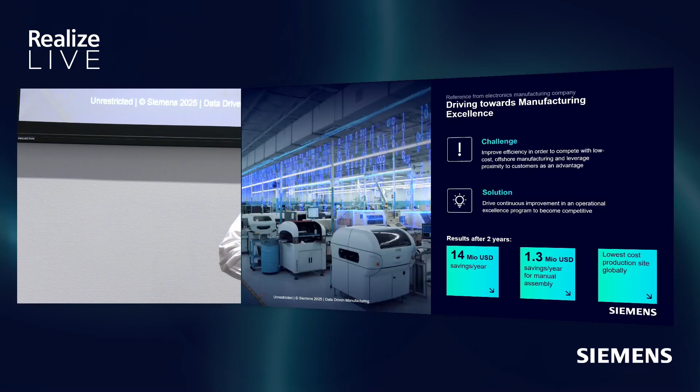So their solution was to drive a continuous improvement program as an operational excellence program. And after 2 years that they embarked on this journey, they achieved $14 million recurring savings per year on the SMT line, $1.3 million savings on a final assembly line, and overall became the lowest cost manufacturing site worldwide for this company.

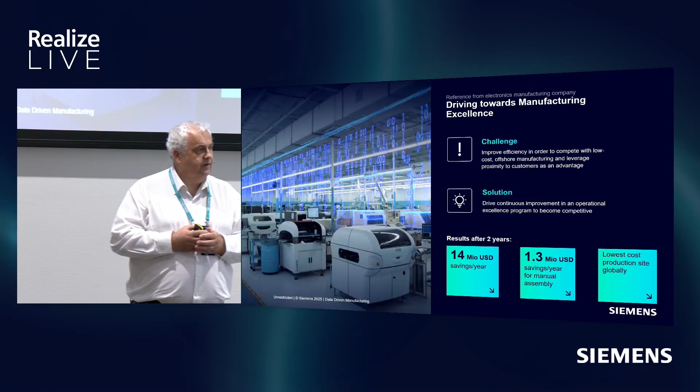Now, why do I start with this little story here? Because I've been in manufacturing for more than 30 years. I've lived in the US, I lived in Asia, I lived in Europe. I've seen many, many customers around the world. And one thing they always had in common, each year they had to achieve a new target. They had to improve something. Either it was productivity or quality or on-time delivery or incidents or inventory turns.

It just never stops. And you know what? When you set a target, I need to increase my productivity 7% for this year, and maybe after 11 months you even achieve it, what do you do? You lean back and say, that's it, finally done? Never. You say, okay, what shall we do next? Do we increase more? 7% was not enough, or shall we go after another KPI?

And once you optimized, all of a sudden a new technology comes in. Now in electronics, for instance, you have smaller components. And now the whole quality drops, the productivity may drop, and you have to start this process again. So how did this company do it?

They knew benchmark was about 5 minutes. And so they set a target of about 5 minutes, and they started to optimize. Initially, the thinking was quite simple. Oh, I know how they do it. They have changeover tables, they have extra feeders. Let's order these additional assets. They went through procurement, ordered it. A few months later, it came, and all of a sudden, they reduced the changeover time from 30 minutes to 15, but they were not down yet at 5.

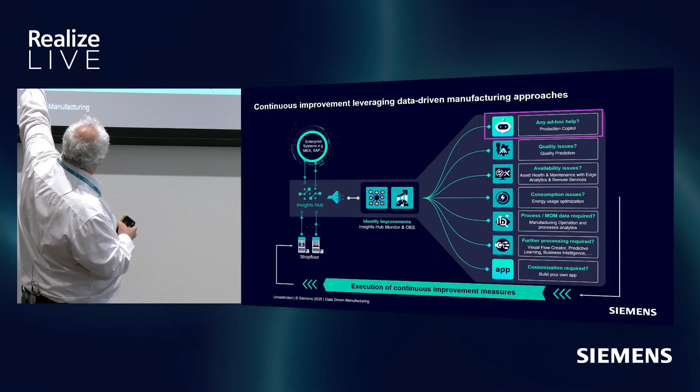We also created this framework, and just a few things to mention here is we collect direct data from the shop floor, but at the same time, we collect data from other systems like an MES, like a quality system, and so on. Because we bring those two data together to contextualize, and I will talk about how important contextualization is in a few slides as well. We created transparency, and we have several apps, and this is only a snapshot, there are more than this, to help you address certain problems a little bit more efficiently.

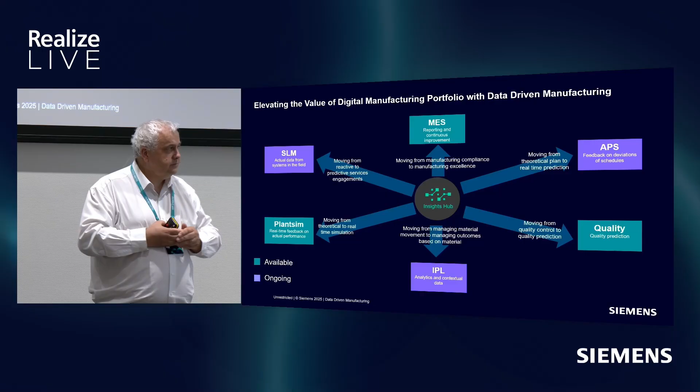The other piece that's always important for us is when we talk about data-driven manufacturing, you collect data and you create value. So we always look into how we integrate our data. Insights Hub is our analytics platform. When you integrate it with an MES system, where the main functionality is about process compliance, you turn it all of a sudden into a solution to help you achieve manufacturing excellence.

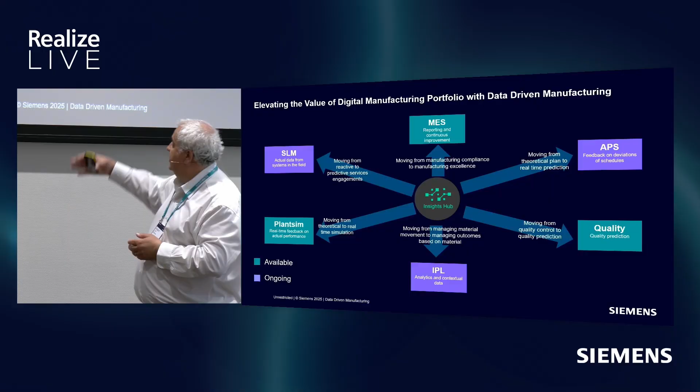Similarly, when you embed it with a quality system, it changes the quality system from quality control to quality prediction that allows you to improve quality ahead of time. Similarly, when we do it, let's say, with a plant simulation, where we have created all these virtual simulation models, all of a sudden we are updating it with real-time data and it becomes a real-time simulation model. So important for us is that we always enrich our applications that we also sell in our solution.

Now, what we see very often is when I talk to customers on how they do this process, the continuous improvement process. Today, most of the customers do it with pen and paper or Excel and so on. They don't really have a system here, and they struggle. Often I see them hiring consultants, and you know what the consultants do?

They're highly paid. They take stopwatches, they take time, they take files, they compile them, they try to create transparency for this improvement process, and they improve. But what we also very often see is once these consultants leave because the job is done, nobody takes the effort anymore to collect all this data, and the performance usually goes down.

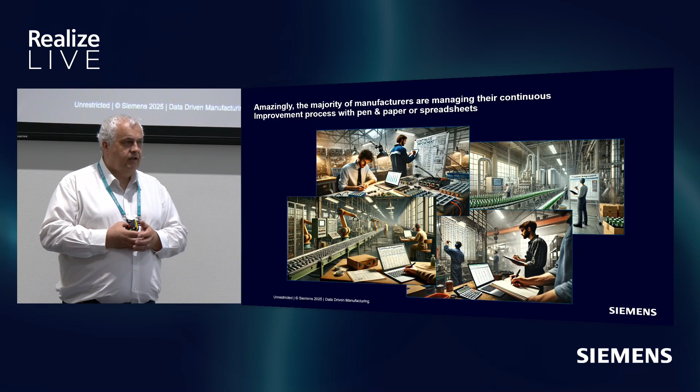What we also hear, some customers say, no, we are a little bit ahead. We believe that we are now in a digitalization age. But when we ask them, so what do you do with the data? Many of them say, well, we just started to collect data, or we haven't started to analyze it yet. We don't even know where to start.

Reality is, as long as you only collect data, you're only creating a jungle of data that's only cost. There is no value. And it's quite expensive. Right? You have to use the data. And one of the takeaways that I would like you to take away today is the statement that I make right here now: data without context is not knowledge, and knowledge without comprehension is not wisdom.

And what we have done with our solution is we thought about this very hard, and we created a data contextualization engine to do exactly that, and we created a co-pilot that is able to comprehend all the knowledge that we have and create wisdom. And this is what I'm going to show you over the next few slides on how this will work.

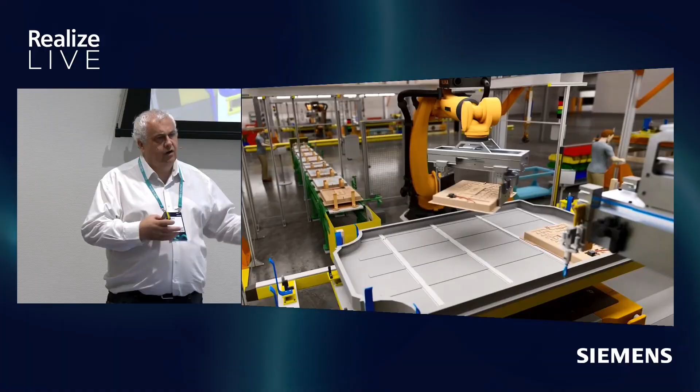When we talk about the improvements now, again, we spoke initially about a workflow improvement. Well, we have simulation tools today for workflows. Now, this is an industrial metaverse, right? It guides you through a factory. It's built on some of the tools like Plant Simulation, Process Simulate. You can see the flow of material through a factory. You can see how robots are acting. You can see the cycle time.

You can validate the programs, if they are correct, if they function the right way or are destroying something and hitting each other and so on. You can also check humans, how fast they are. Is it ergonomic for them? Is it safe for them and so on? Right? This is a much, much better and more efficient tool than in the past when people went to the shop floor, watched it, looked at it and tried to improve.

They made some changes. The next day they came back and said, well, in the last 24 hours, did we improve? Shall we keep this change? Or did it get worse? Shall we go back to what it was yesterday? Now we can do all these simulation models in minutes instead of a long time. But this is data-driven manufacturing.

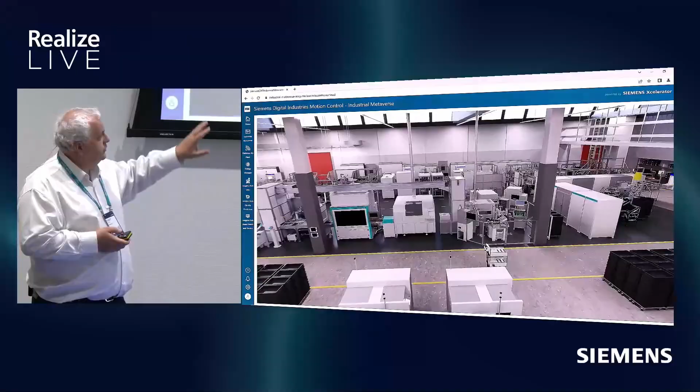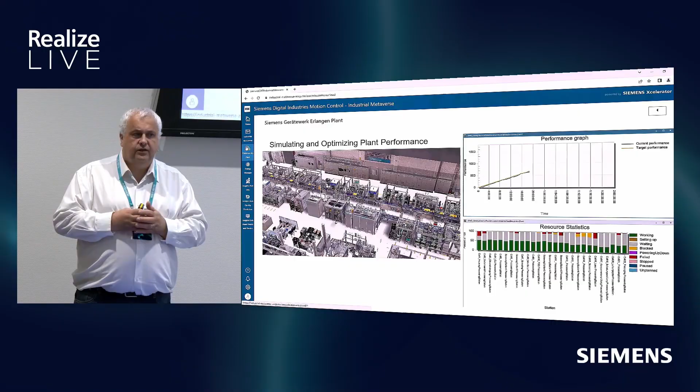So what if we take such an industrial metaverse? This is one of our factories in Erlangen, Siemens. So it's an industrial metaverse, but it's now enriched with real-time data and simulation data. So we can have both in it to actually simulate how things work. We can look into a certain cell, not just see how it behaves, but also what are the KPIs.

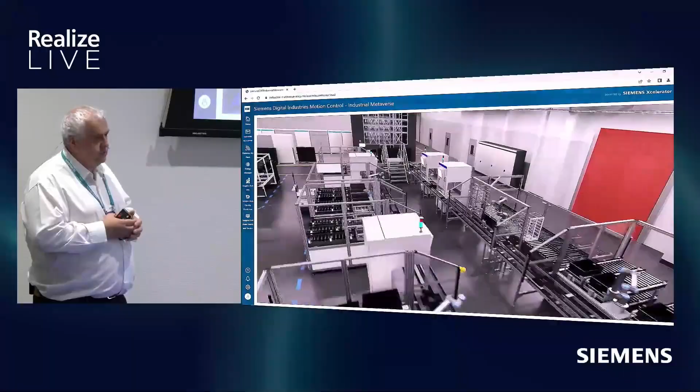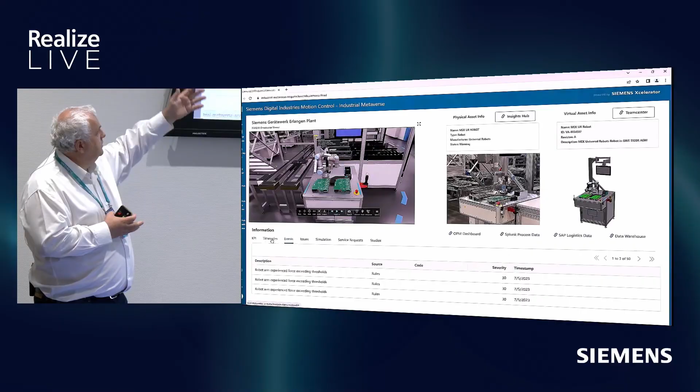We can go to a machine that has a problem. And again, you look first at the KPIs to see whether it's okay or not, but then you can also look into time series data, events data, and so on. If you load time series data, you see maybe an abnormality, and you need to troubleshoot what it is.

And when we talk about real time, look, this is the real robot, this is the virtual robot. And when now the human comes, just have a look what happens to the virtual robot. This is what we call real time. All of a sudden, the simulation models are so much more accurate. They reflect really what happens there, and not just on a theoretical basis, actually on a real-time basis.

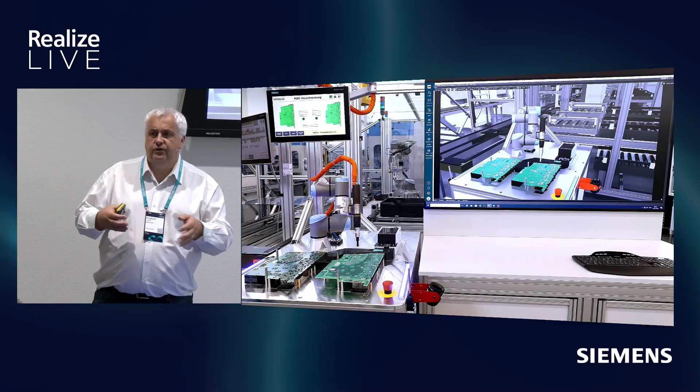When we talk about process and asset improvements, it's different. Here we show you a little video about a maintenance case.

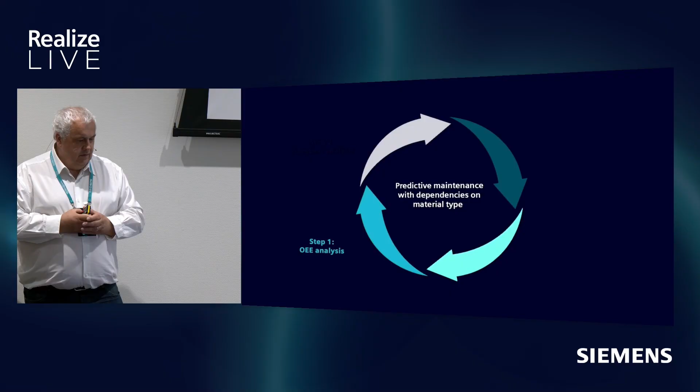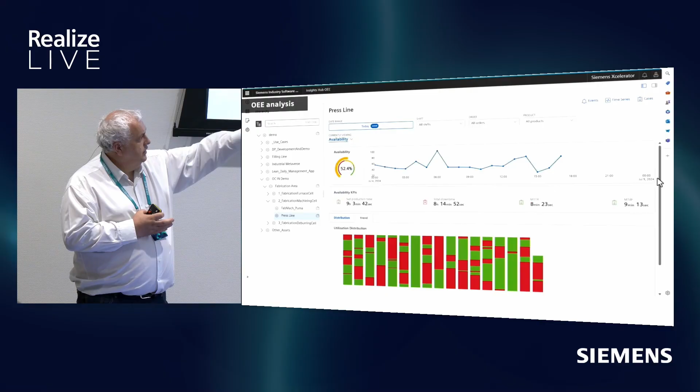Okay, now it's starting. So this is a maintenance case where we analyze why the performance of a machine is actually dropping. We look into availability and see it's not very good. So we drill down and look into the time series and see at the end of the period, actually you have a little bit of a drop. You see a lot of red bars, which is downtime. So we do a downtime analysis and it tells us it's a drivetrain issue.

We call maintenance and they confirm, yes, it's a drivetrain issue. The problem is they don't know why. Right? And they're searching and getting frustrated. I cannot figure out. It's random. Sometimes it happens, sometimes not. So we go into contextualization, check, is it always the same shift? Is it always the same product, always the same material? Oh, there was a high overlap in material.

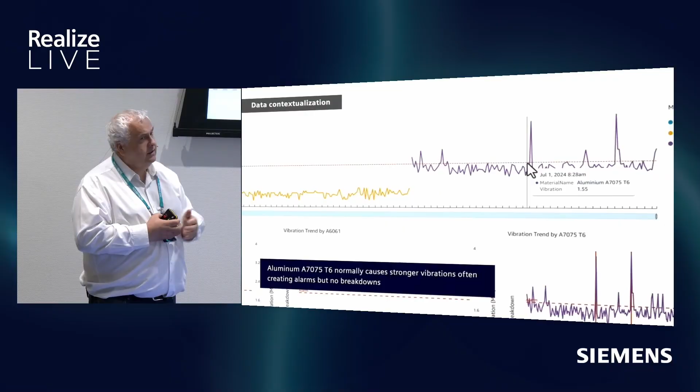So we look into the material and see on a third material base, the vibration is higher. Now in this case, the maintenance team says, okay, it's higher, but it's not damaging anything. So they're increasing the threshold for this third material so the machine doesn't stop and it continues to run.

But the point that I wanted to make is very often in life, one data source cannot tell you the true story. It gives an indication. Yes, the machine stopped. Yes, it was vibrating. It's a drivetrain issue. But in order to find the reason, you need to be able to contextualize. You need to find correlations. What else happened at the same time? So this contextualization engine is very critical in the root cause analysis to accelerate this one.

So when we then go to improve things, here I show you how a Copilot works. Okay, it's running now. Again, the typical way in the past was we see a line that's red, it has some issues. I click on it and I look what happened here. Right? So I look into the events, I see an error code, 0x whatever. I don't know what it is, maybe somebody knows or I need to look up in the manual. That's our old way.

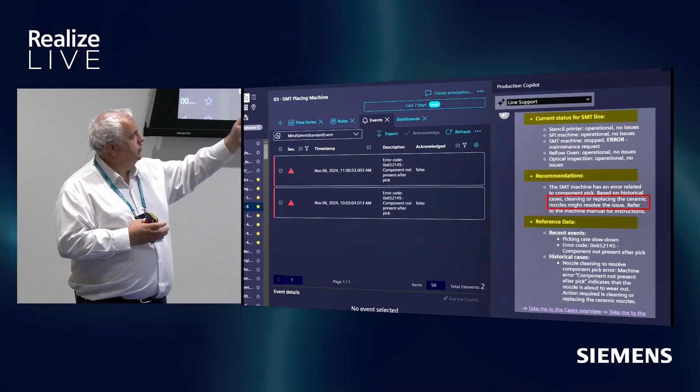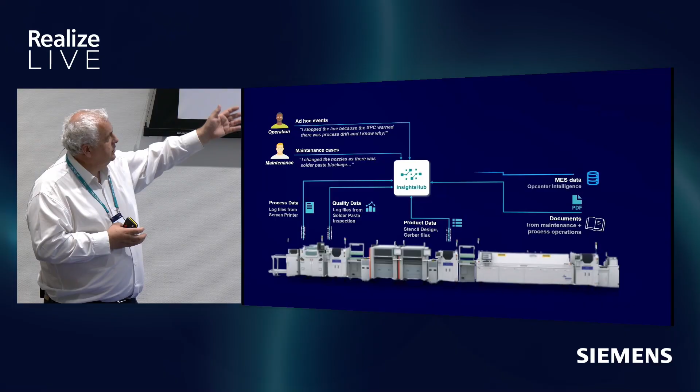But what if we change the way we work and I ask a Copilot, can you summarize the status of the line? Right? And it analyzes it, and it gives you 3 areas. The first one tells you what's the equipment state. The second is what it recommends to do. And the third one is the source of the information. Why does it know this? Because it collects real-time data. You can also collect ad hoc data that's entered by people. It uploads manuals. It can also connect to MES data, and it has everything at the fingertips to come to this conclusion.

And what's always important for us is, of course, I can now see the nozzles are dirty, and maybe I know how to do it, maybe not. If not, I just ask the Copilot how to do it. Now, it gives me real instruction because it reads the manual and writes it down here. Now, if I'm not sure if this is right, I can always click to the source of the information, and I see the manual. It jumps here, it gives me the instruction on what I need to do. It's much more efficient than everything else today.

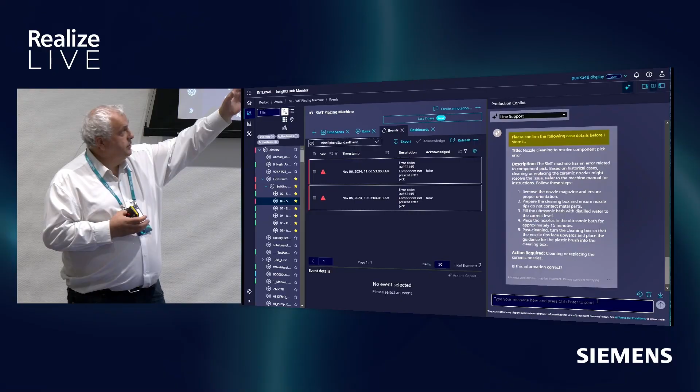Now I'm saying, okay, I don't know how to do this. I want maintenance to do it for me. So I create an incident. Now it writes me the report for an incident. This is a much better quality than if you ask me to write it, because I just say nozzle is dirty and that's it. Here it gives all the background information. I can reread it. I can edit it if I want, or submit it. And then I quickly decide the urgency of it, and I'm done.

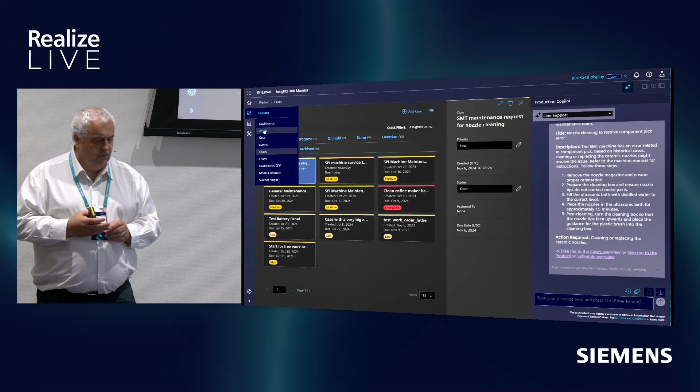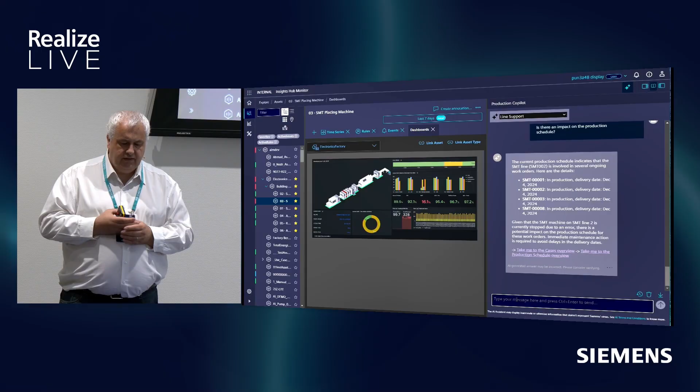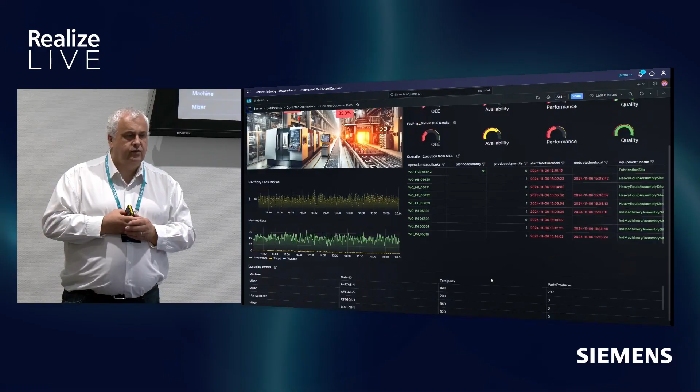But now my next question: is there any delivery impacted? So I ask if the production schedule is impacted, and it gives me yes, 4 of these orders will be late. And now I can tell the Copilot, okay, please bring me to the scheduling engine, because I want to see if there's something I can do, shift some sequences of other orders and so on. But this is a completely different way of how we today can work with the lines. It's really changing. We're in the beginning, but this is already quite amazing for me, how this works.

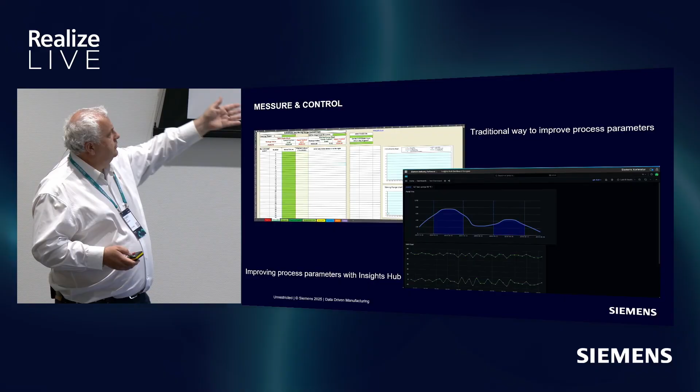So one of the hardest things is always the control area. For me, when we do continuous improvement, it's relatively easy to achieve a certain KPI once. But it's very hard to keep this KPI on a consistent basis, regardless of who is working at the line. I may have some good people, I may have some people that we just hired from McDonald's next door that are being trained as an operator and so on. That's real life, right? Traditionally, we always used Excel. Of course, we have now data. That's quite simple. But what's important is when you improve a KPI, you need transparency.

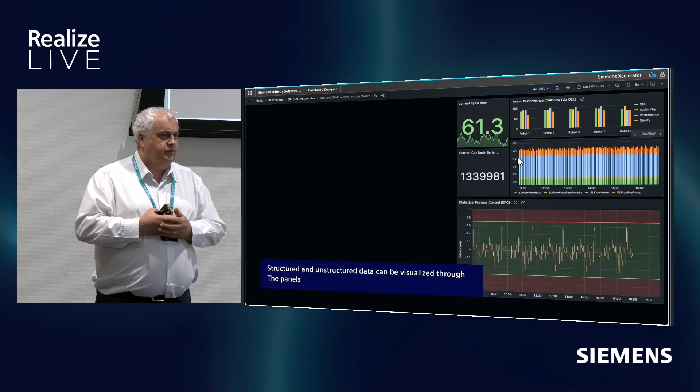So for this, we have the dashboard designer. So we can go into the system, and the dashboard designer has created a dashboard already for structured and unstructured data. And I can see, I can link it, I can go to all my KPIs that I already have, can import them or just link to them, whatever I want. So it's quite flexible in what I want to do.

But in this case, if I say I want to improve cycle time, every person in my factory that can influence the cycle time needs to see what it is. They all need to understand the impact of the work. So you select basically the machine that you want to have, or the line, or whatever it is. You select what kind of data. In this case, we say the cycle time data. You decide on how this will be shown, whether it's a bar chart or a line chart, or in this case, maybe a histogram is the ideal solution.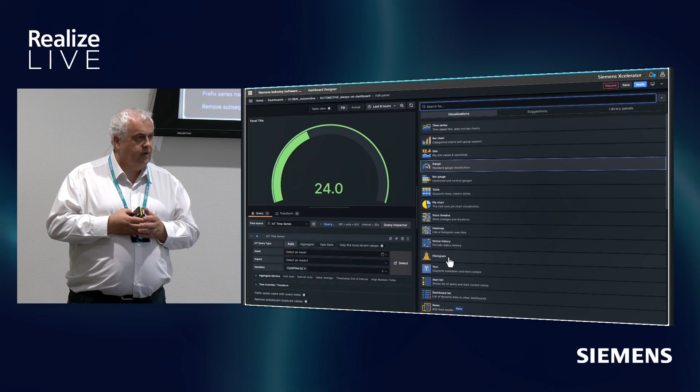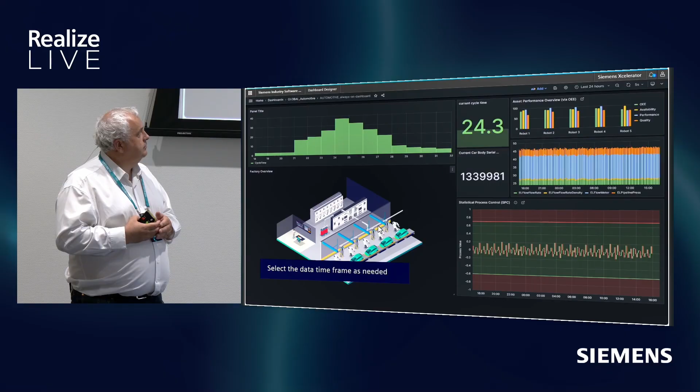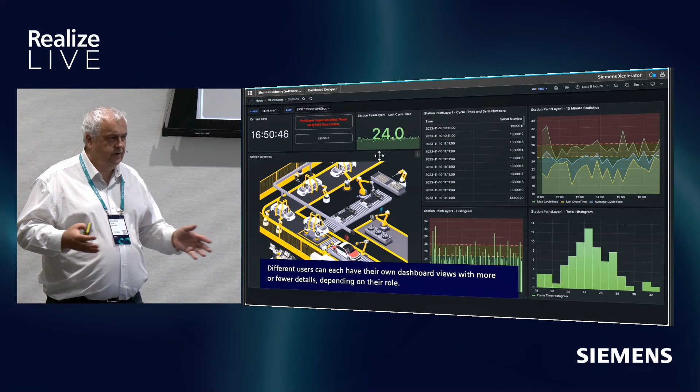You select it, you resize it, and you have now created transparency. Because it's important that people understand if they change something, if they improve something, maybe get worse or whatever, they need to understand the impact. And from here, of course, you can also imagine this is now one, let's say, operator that needs to work on it. I have a different operator that also may impact it. He has a different dashboard, and here you just add it in his.

Important is, again, this is a tool that you as customers can use. You don't have to hire somebody from Siemens and say, now I need to do this, because this is creating on a concept when you have to be able to modify it.

Now what happens after you have this been running for a few years? You may end up with 200 dashboards. We have, for instance, Siemens. They have created in the meantime somewhere between 200 to 300 dashboards. So what do you do? You look at all of them, you wouldn't see anything. It's too much. So once you have improved a KPI and it's consistently within the target, you move this KPI to the background. And it only appears when you violate it again. I think that's very important.

Why is this important? Because you have improved, using these dashboards, the performance of the line, of the machine, of a KPI. You want to monitor it also in the background, so you don't go back. But you don't need to look at it every day, because you have improved the process, and it's now quite robust. But you never know. If a machine needs maintenance, then maybe you may violate a KPI again, as an example. Or if a material is bad from a supplier.

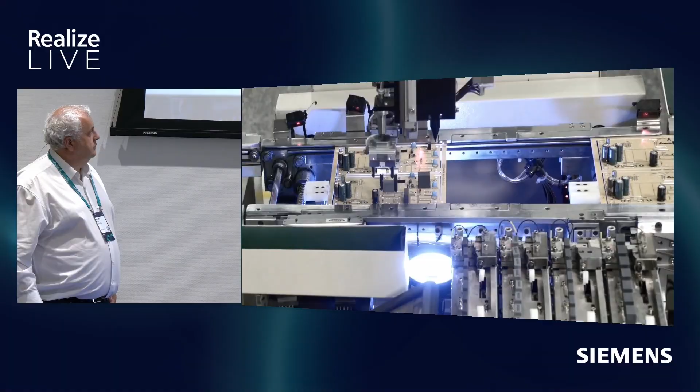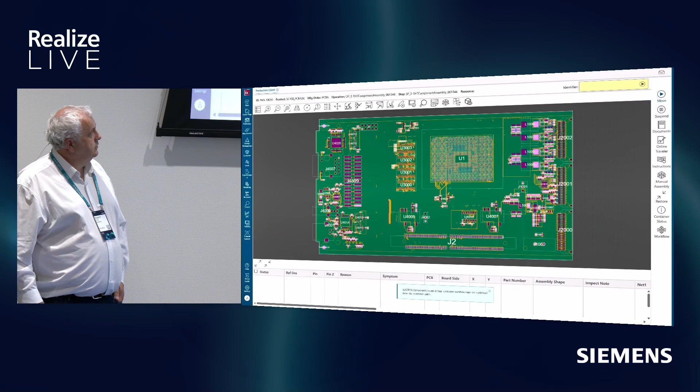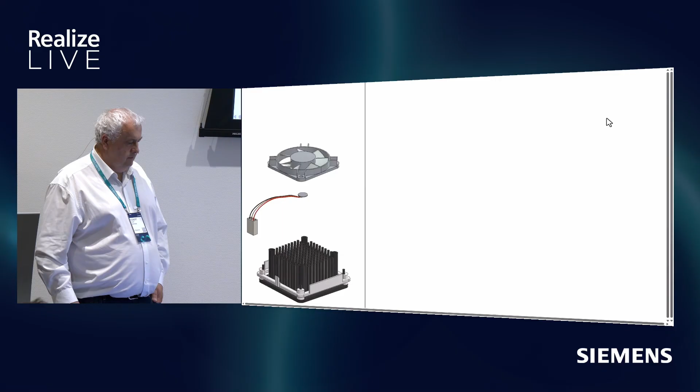Welcome to the world of smart manufacturing for electronics, where intelligent execution, AI-powered insights, and low-code agility converge to transform operations. Here, on the shop floor, we see Opcenter Execution Electronics in action, orchestrating operations through the bill of process and the 5 M's: man, machine, material, method, and metrics. Every step, every task is digital, setting the stage for real-time control and long-term optimization. This box build cell is one of many across the plant, each working on complex assemblies with precision and traceability.

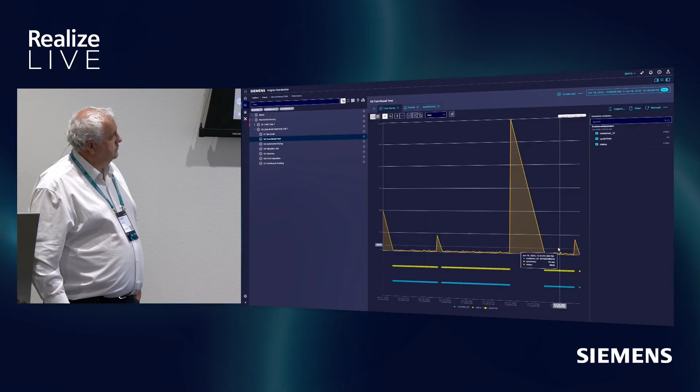Meanwhile, in the operations office, Insights Hub provides a plant-wide view of performance, not just what's happening, but where improvements are possible. Through AI, the system detects throughput fluctuations, missed targets, or process instability, and proposes realistic, data-driven goals. We ask the Copilot AI, where is performance drifting? The AI responds with insights, targets, and recommended actions, all based on real historical data and proven patterns. But how do we bring these insights back to the people who need them most, the operators?

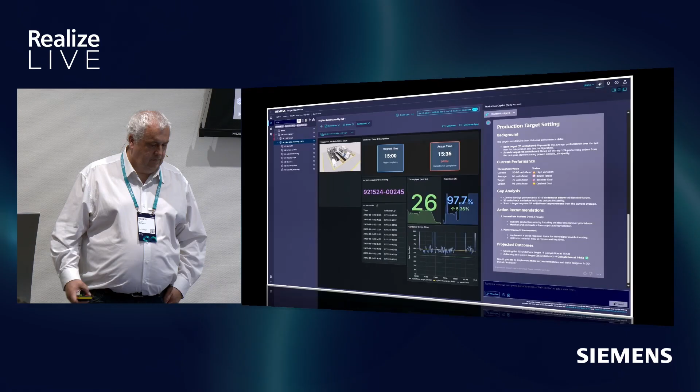Enter Mendix, Siemens low-code platform. In just a short time, a powerful on-screen app is built. It displays real-time throughput, compares actual versus target, shows stretch goals, and uses color indicators to guide action. As an example, operators can press a support button, record a short message, and send it directly to a mobile technician who responds with an ETA. Another button lets them log a deviation, voice-to-text enabled, fast, traceable, efficient.

Now, back on the shop floor, both systems run side by side. MES executes the work. Mendix guides performance. AI feeds intelligence into both. This is data-driven manufacturing in action, where execution meets intelligence and insight becomes impact.

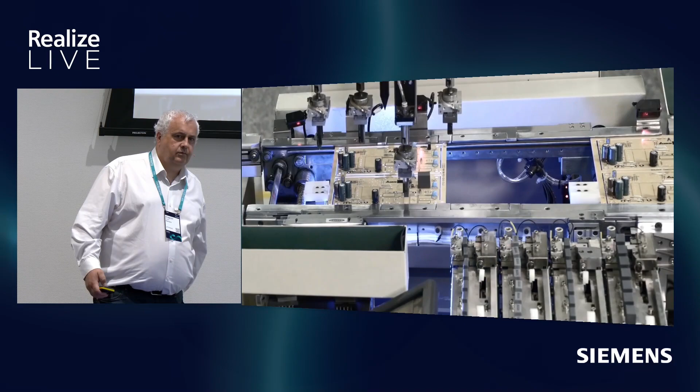So this was now a little bit an example of how we actually work in our portfolio together to bring the solutions for the whole continuous improvement process together. It's not just one, it's an integrated solution because people use different tools on the shop floor. They don't want to switch applications and so on. So it all has to be integrated and make very efficient ways on how to drive the execution of this data.

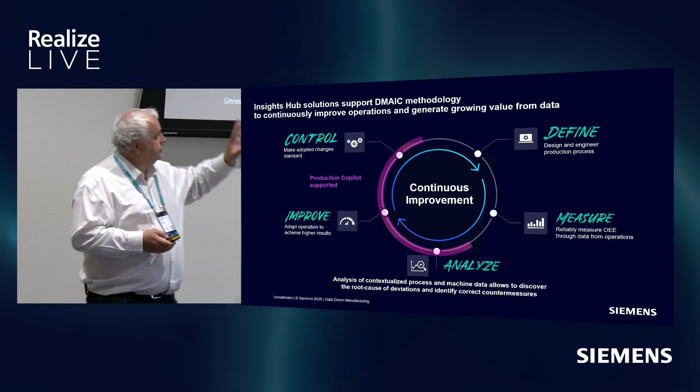Now, so far we have looked into this continuous improvement process. And this was primarily, or actually only, the descriptive approach that we have seen. It's already amazing what we do here. We also have predictive analytics, and we will go a little bit into prescriptive also. Again, to explain a little bit what's the difference between descriptive, predictive, and prescriptive, I always use my example.

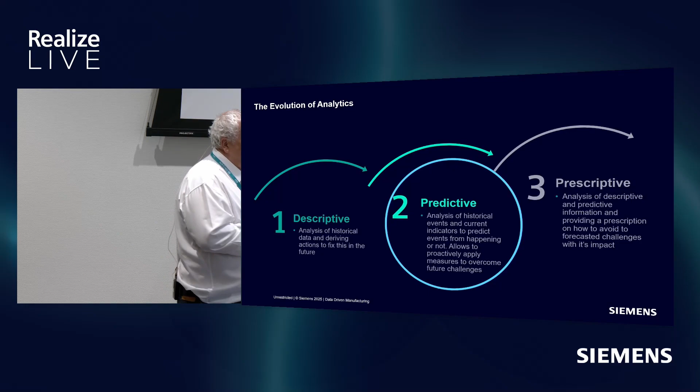When I go to a doctor, he looks at me and says, yes, I can already tell you didn't eat healthy, you don't do enough sports. So this is descriptive. He knows what he sees for me. Predictive is, he tells me, you need to watch out because overweight people have a risk of high blood pressure and cardiac issues and so on. But prescriptive, then he tells me, you know what, you need to change the diet, you need to exercise more and take these pills for the high blood pressure to prevent anything from happening.

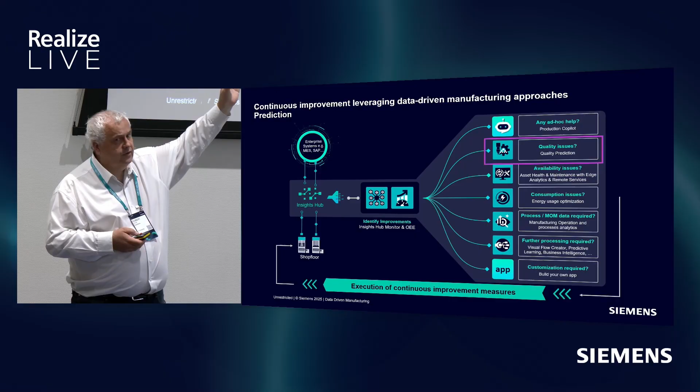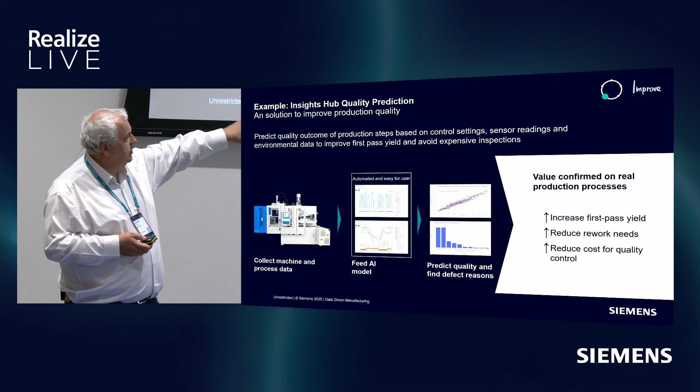And similar in a factory, this is the same thing. Descriptive is looking into the past, into the history, and learning from it. Predictive is looking in the forecast. So we have some apps, for instance, the quality prediction, we have energy prediction, we have a generic prediction that we can use for different methods. And how this basically works on a very high level, I'm sure there are some other sessions that go into more details here. But we basically collect machine and process data, we feed an AI model, and we predict the quality and the defect reasons for it.

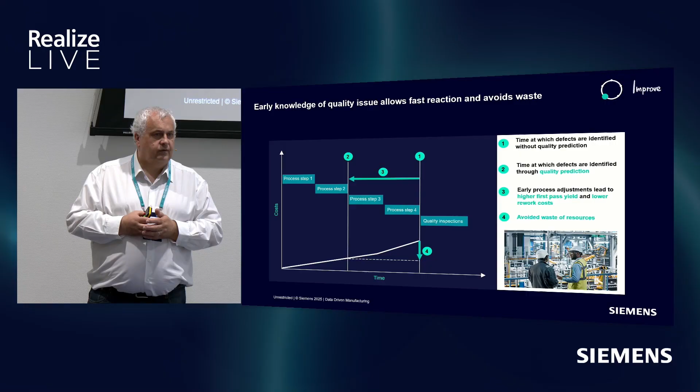Right? Why is this important? Because you have a multi-stage process. If I can predict the quality after step 2, there is no need to run a bad product through step 3 and step 4, wasting machine time, creating more scrap, more expensive scrap, or rework, and so on. So with this we have customers save millions because they can actually, early enough in the process, decide whether it's good or bad, especially in some of the industries like battery, where you have to wait for the final quality results, sometimes weeks. Right? So this is important when we go into predictive.

Prescriptive, again, when you think about it, how do you get to prescriptive? Once you combine predictive with a co-pilot that we have that has all the knowledge combined to it, that's where we go into prescriptive. We are not quite there yet, but we are not far away. This will be the next stage that we do.

Now, we had those 4 use cases at the beginning, primarily workflow-related topics, primarily process-related topics, or a combination of workflow, process, and asset-related. And for here, we have basically industrial metaverse to address this one. We have the data contextualization for this kind of topics. We have the co-pilot for the other kind of topics. And really, what we do with all this solution is we accelerate the time for the improvements drastically here.

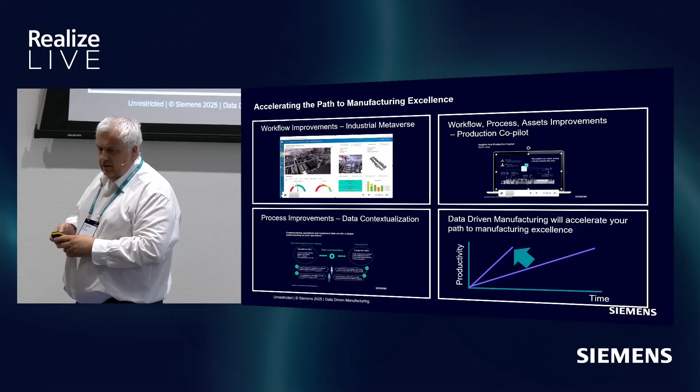Now, it's my last slide as a takeaway for today: continuous improvement never stops creating value. Because you improve something and then you go on the next journey. So you need a solution. If you only buy an app to solve one problem, once this problem is solved, this app has no more value. When you have a system that helps you continuously improve, it just never stops creating value.

Now, Insights Hub allows you to drive the operational process of continuous improvement. We still require knowledgeable people on the side, what to do, what to change, how to improve, and so on. Not everything is given yet. Data contextualization is key because it turns data into knowledge, and the production co-pilot accelerates your journey to manufacturing excellence because it turns knowledge into wisdom.